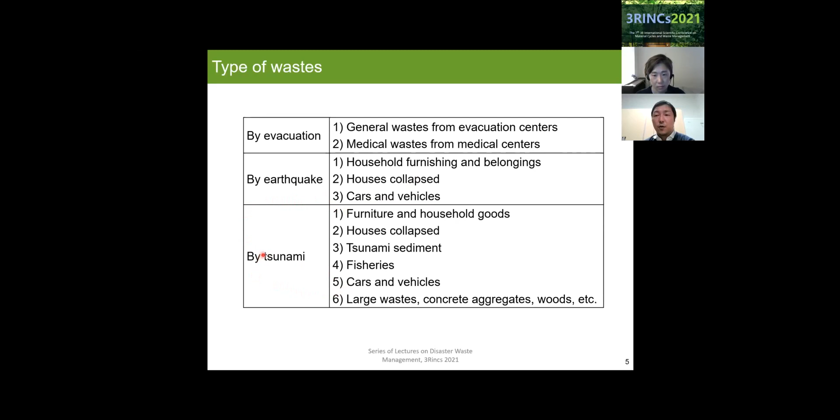But when tsunami also occurs, there are many more wastes generated, including the same categories - furniture, household goods, and collapsed houses. But in addition to these items, tsunami sediment, fisheries or aquaculture waste, concrete aggregates, wood, etc. are also generated. So a lot of various waste is generated when tsunami occurs.

So these are kind of categories - you can see they are really clearly defined, and it looks like these wastes can be generated separately. But the actual state is totally different. For example, this is a state of disaster waste - various wastes are mixed and need to be separated for appropriate disposal.

So you can see from this photo that e-waste and tires, or stoves or furniture, are mixed together. But we need to consider recycling disaster waste as much as possible. I will explain later why this separation is necessary.

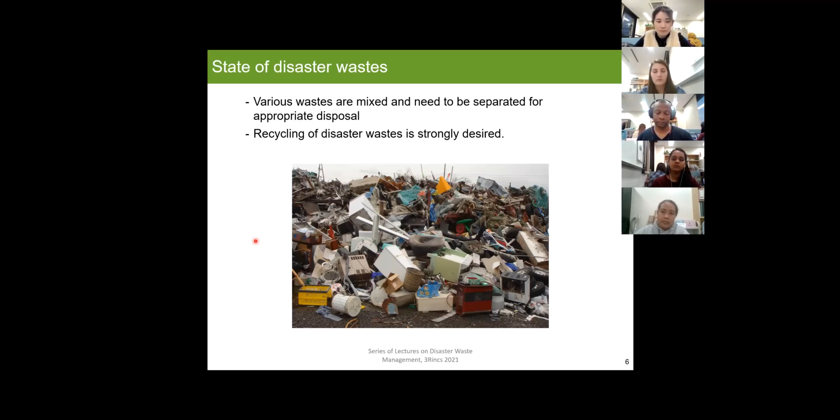This is some examples of mixed disaster waste. Of course, it's really important to remove waste from affected, damaged areas as soon as possible, because we need to reconstruct such affected areas. So the removal of waste is really important, and it has to be done quickly. To do so, of course, it's really difficult to collect, for example, only wood, only metals, only plastics, etc.

So it's very easy and fast to collect everything and deliver it to a storage site - of course it's much faster. But when those mixtures are accumulated and piled in one place, as you can see here, fires occur.

Fires occur because organic matter is included in this mixed waste. So it's really dangerous and should be avoided. So separation is really important.

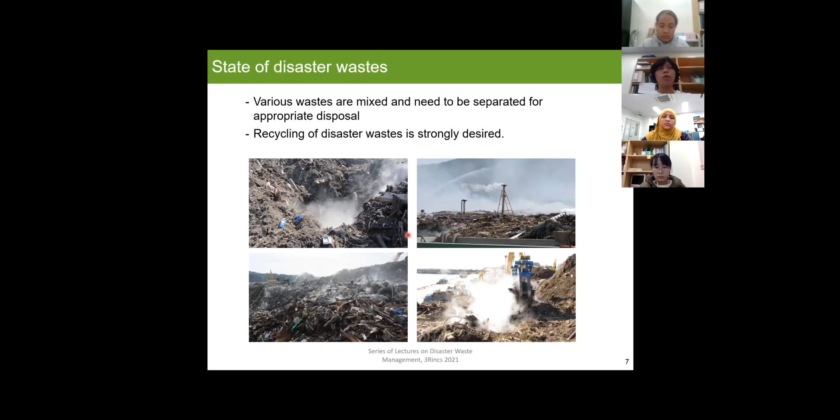Until yesterday, I went to Kumamoto. Kumamoto was affected by heavy rain last July, and flooding occurred. River flooding excavated the riverbed and delivered a lot of soil, and such sediments deposited on land.

If we use this kind of soil containing woods or other waste, such structures, for example embankments or other structures, are not strong enough. It can become very weak if the organic matters disappear over the long term. So separation is really important.

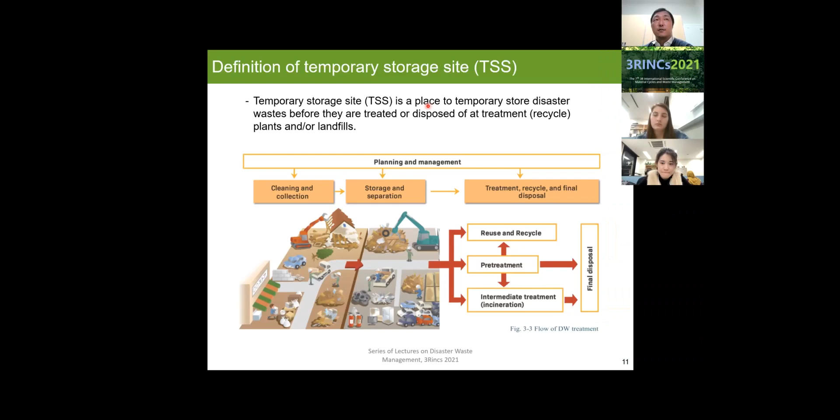About the definition of temporary storage site: TSS is a place to temporarily store disaster wastes before they are treated or disposed of at treatment plants and/or landfills. You can see this figure.

After removal from affected sites, those wastes are collected and delivered into this temporary storage site. There, the disaster waste of mixed condition is stored and separated. After treatment and separation, each material, each waste, is disposed of, reused, or recycled. This kind of place is really important to handle such disaster waste of such a large amount.

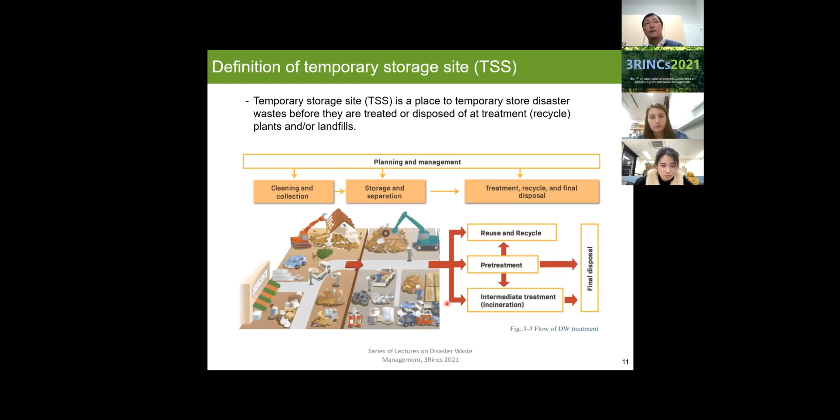Why do we need temporary storage sites? To enhance the efficiency of disaster waste transportation, for better reconstruction works of affected areas, we need to gather disaster waste in a certain place, and remove it from affected sites as much as possible. So this kind of temporary storage site is really necessary.

Also, to allow separation and enhance reuse and recycling - this is also a really important issue. To reuse and recycle, to utilize disaster waste, separation is really important. So to do such separation work, temporary storage sites are really necessary.

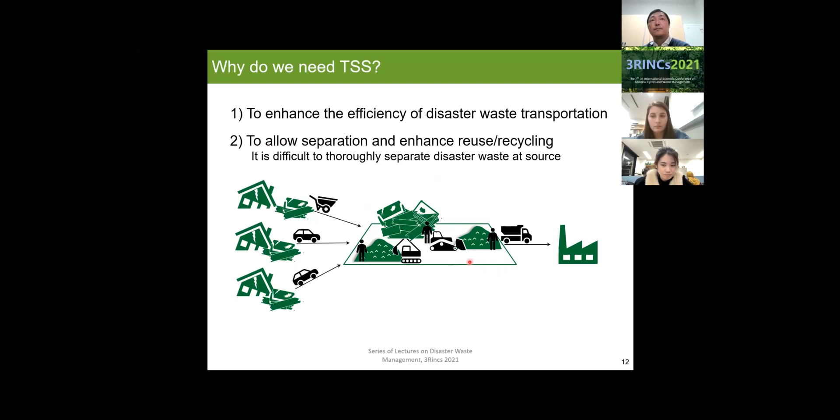So I explained the necessity of temporary storage sites. What would be the requirements for such sites? There are many requirements, but I think there are two main ones. First is easy access from affected sites, but not too close to residential areas.

A lot of disaster waste has to be delivered into temporary storage sites. If the site is too far from the affected sites, it takes time and costs a lot, so it's not effective. It should be close to affected areas.

Especially when disaster waste becomes a problem, it's generated basically in downtown areas. If disaster waste is generated in, for example, a forest or very countryside area where nobody lives, some guys may leave that waste for a while. But when we have to hurry up disaster waste treatment because it occurs in a downtown area, we have to remove that waste as soon as possible.

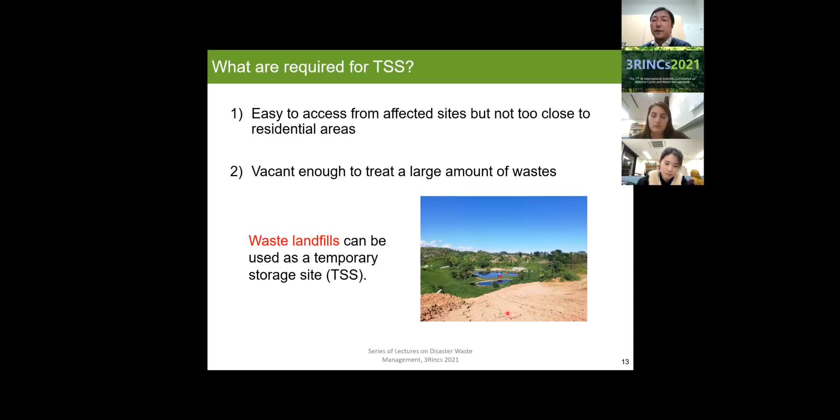So this is a quick review of the knowledge about the temporary storage site and waste landfills. The space for separation, which can accelerate recycling, is really a good aspect of waste landfills. So again, waste without separation, but resource after separation. So waste landfills can ensure enough space for separation works.

I explained that separation is really important, but of course we cannot achieve 100% recycling, and some waste should remain as waste, and we have to dispose of it into waste landfills. So if we conduct such separation works in waste landfills, it's very easy to dispose into landfills, and it can accelerate disaster waste management.

The amount of waste disposed into landfills may vary according to the type of disasters or the magnitude of the disasters, but we always need to ensure enough remaining landfill capacity, always.

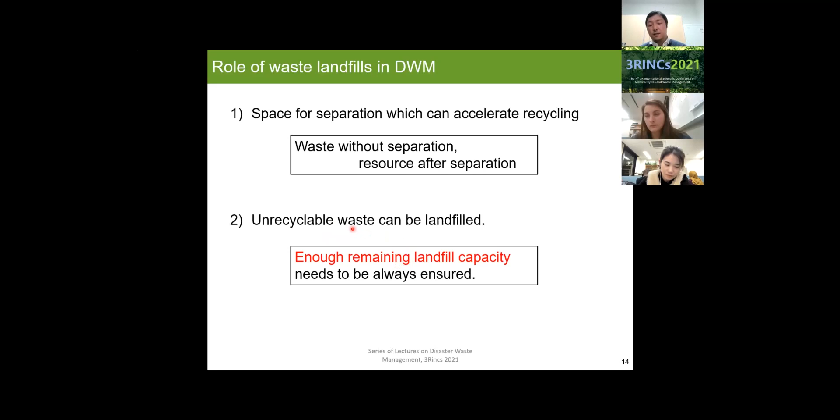Okay, today I'd like to give you two quizzes. The first one is this: I'd like to think about necessary tools, equipment, and machines for disaster waste treatment together with you.

As a first one, for cleaning and collection at affected areas, not the temporary storage site, what will be necessary to clean and collect that disaster waste? And the second one is storage and separation, which should be done in temporary storage sites. So what will be necessary to conduct temporary storage and separation works there?

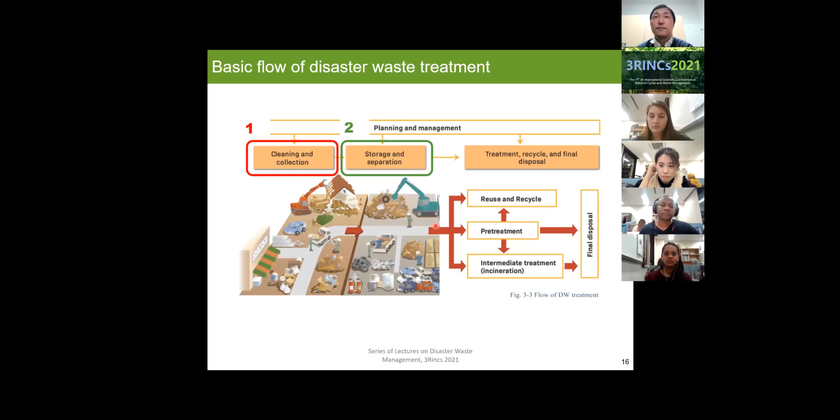I'd like to give you one minute to think about the necessary tools, items, or equipment. First, about cleaning and collection. Please think for one minute. There should be various tools and equipment. But if it's really difficult for you to think, I'll give you one hint.

These are just examples of my idea, but I could categorize them into two. The first one is personal equipment, tools, and machines. What would be possible necessary items for cleaning and collection?

Yes, can we start answering? Yes, for personal equipment, I would select helmet, gloves. Generally, all the PPEs are necessary, and also masks sometimes. Yes, you're right. Anybody else? Do you have any?

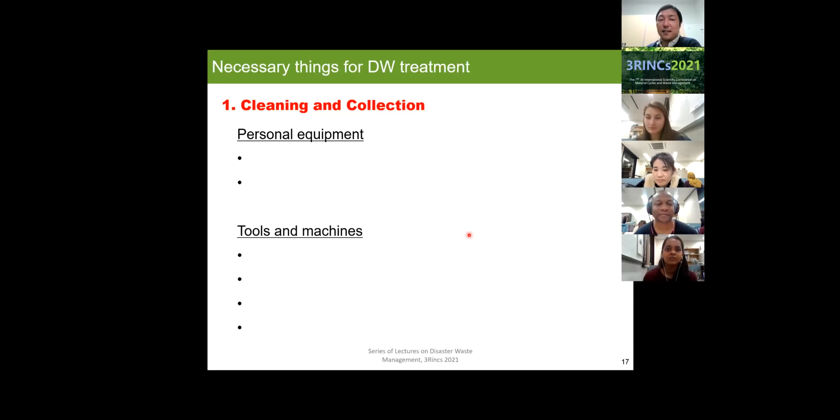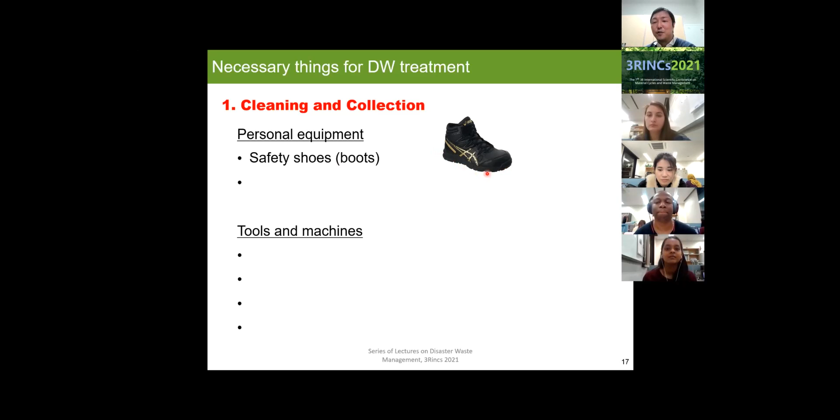Those personal equipments, general personal equipments, are of course necessary. But in addition to those ordinary items, I think this is also kind of an ordinary item: because a lot of waste is collapsed and there are a lot of sharp items, sharp waste, safety shoes should be equipped to do the removal works in affected areas. Do you know these safety shoes? An iron plate is installed in the shoes, so it can avoid puncturing your foot.

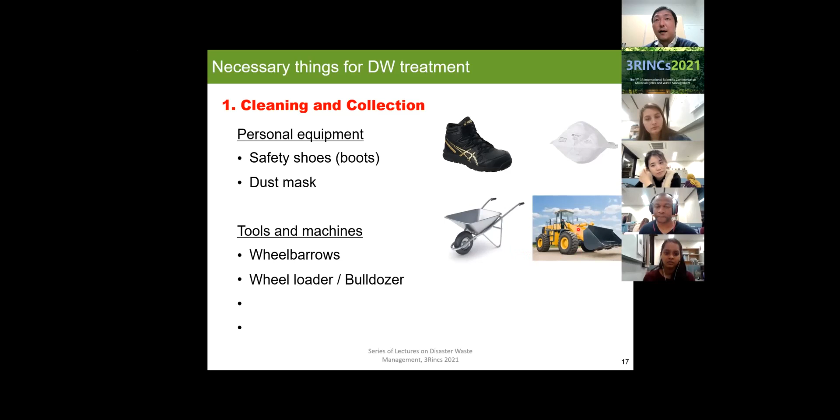And as tools and machines, I think this is really typical and a conventional item, so any country should have this equipment. So this kind of very simple equipment can also help the removal of disaster waste. Wheelbarrows, and this kind of bulldozer or wheel loader, this kind of heavy machine is also important.

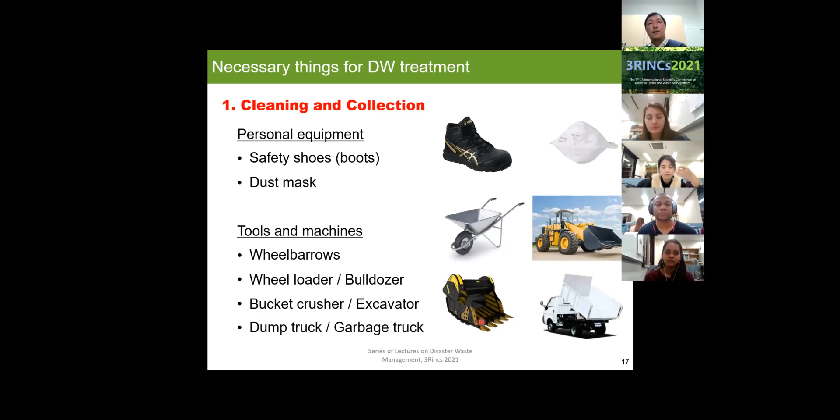An excavator is just a shovel, power shovel, but this is a kind of special bucket, and it can be used as a sieve, so it can collect only large items. If necessary, this kind of bucket is also important. And of course, dump truck is necessary to deliver from affected sites to temporary storage sites.

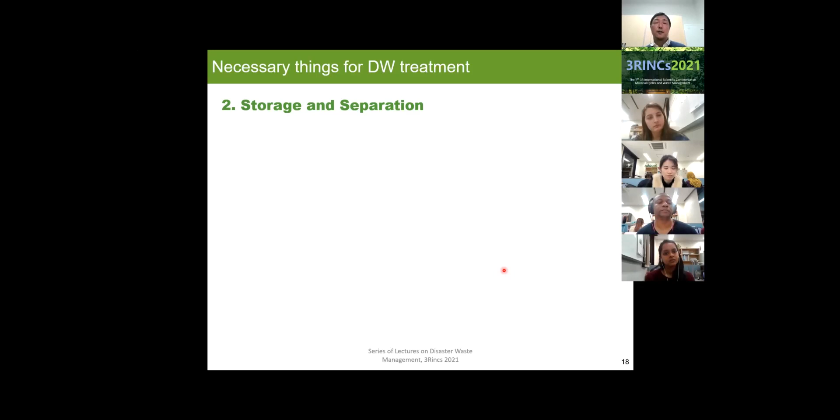Okay, so how about the necessary items for storage and separation? So I give you one minute again to think about this phase.

Professor, I have one question about that. Could you give us some hint about what is separation in here? Okay, so separation means separating mixed waste into each fraction, for example metal, wood, soil, plastic, etc. But this separation works consists of very basic processes, mainly crushing and sieving. Do you know sieving? Sieving is to remove small fractions, tiny fractions. It's using mesh. Okay, so separation works are crushing and sieving. Thank you so much, understand now.

Do you have any opinions or answers for this? Yes, can I answer? Yes, please. I think it needs to move screen or dump car or something to separate and storage, I think. Yes, exactly. What else?

I can give an answer. Yes. Some machine that we can use in storage and separation, I think, is a crusher, steel plate, we can use in this item. Yes, thank you for your answering.

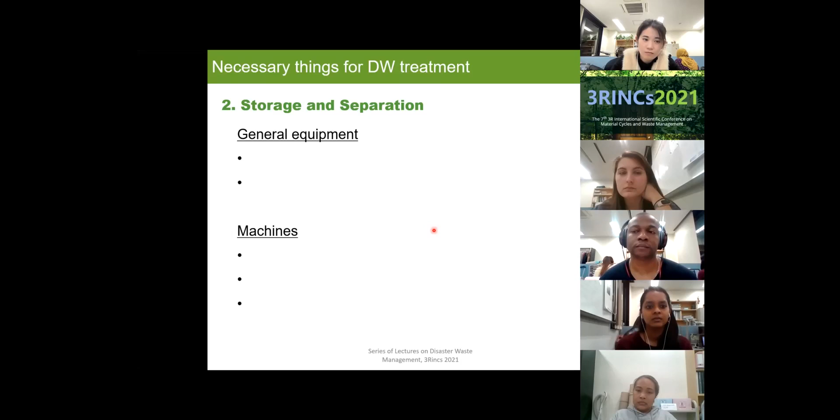Yes, as general equipment, as you said, steel plate is really necessary because some grounds are really muddy and cannot support the heavy machines for separation works. So to realize effective separation works, this kind of steel plate is necessary.

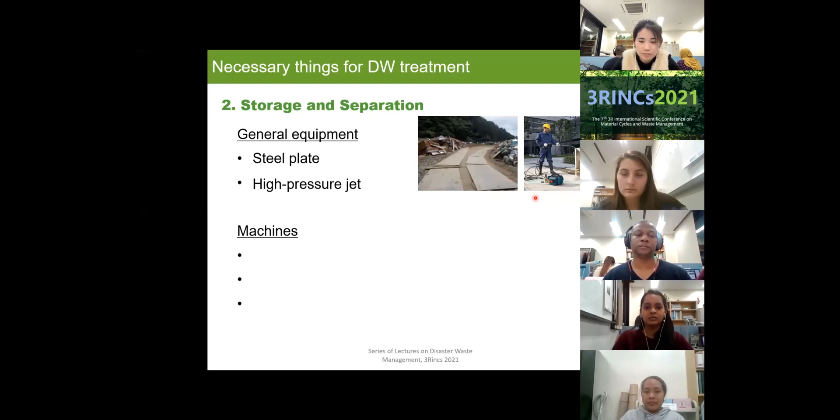And high pressure jet is also necessary. I don't know if all the countries have this kind of jet, but this is really simple - it's just a jet to remove soils from tires. Because if we don't use this high pressure jet, the trucks and dump trucks will deliver soils with those tires, and it will distribute a lot of soils around the temporary storage sites. So in Japan, not only for disaster waste management but also in ordinary waste management, we always use this kind of high pressure jet to remove the soils on tires before they go out from the site. So this kind of high pressure jet is also necessary.

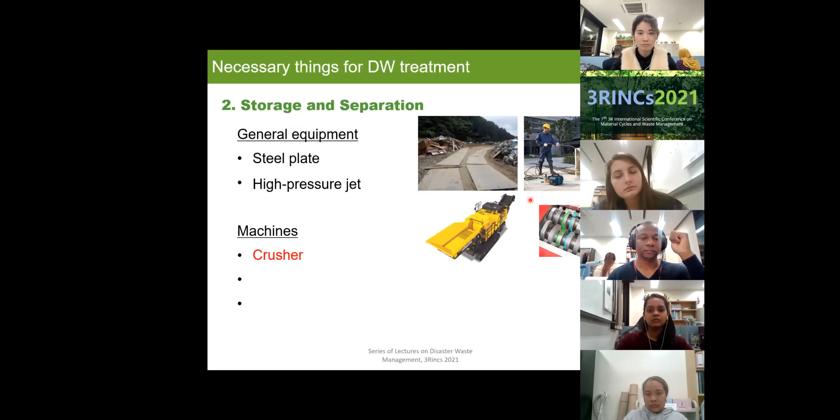Yes, and I explained that separation works consist of crushing process and sieving process. So this kind of crusher is also necessary. But I think any countries should have this kind of similar equipment for crushing some materials, also for rocks or mining or such activities. It's very simple - it just crushes large fractions into small pieces.

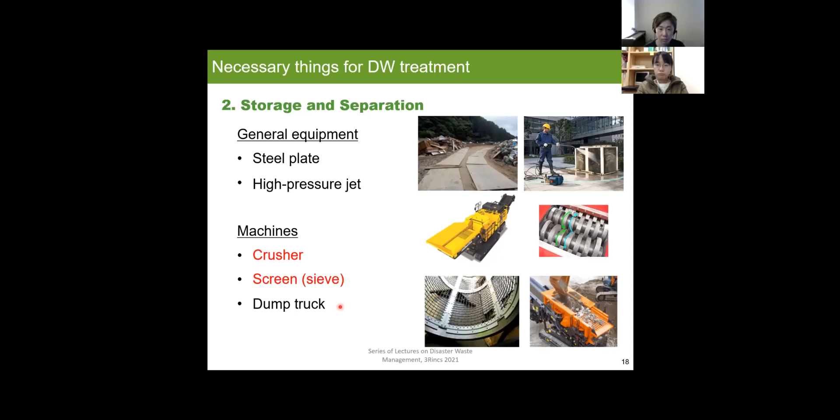And of course, dump trucks are necessary to deliver. So these are really fundamental and basic items, but I think you could recognize that separation works can be done with very, very basic and simple equipment. So I think that's a really important knowledge. Separation works sounds a little bit difficult or advanced, but they are not too advanced, and it's really a simple method. So I think in any countries, separation works can be done using conventional and typical equipment.

So I'd like to introduce only one case study in Japan: separation of disaster waste in 2011, the Great East Japan earthquake.

So in 2011, as you know, the Great East Japan earthquake occurred, and a lot of disaster waste was generated. The basic concept of disaster waste management in this disaster was to preserve the living environment of residents and achieve fast and proper recovery from disaster, but we also needed to achieve reduction in waste disposal.

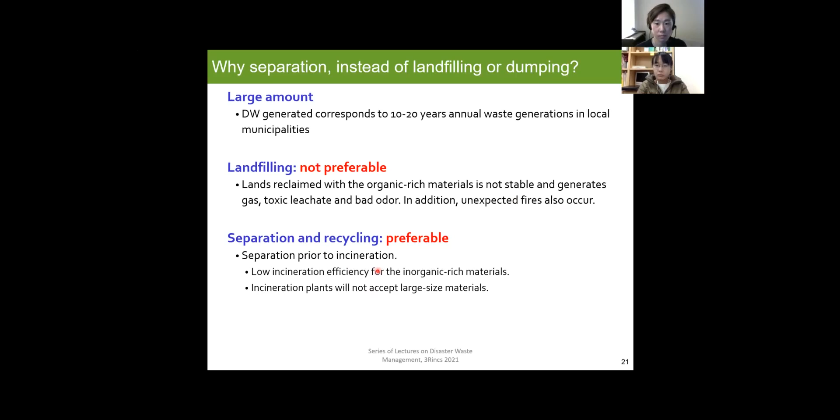In addition, as I explained at the beginning, unexpected fires also occur due to such organic matters. So we had to avoid landfilling all the waste, and we had to utilize disaster waste as much as possible. So separation and recycling was preferable. There are some reasons for the necessity of separation, but I think you can easily imagine why separation is important.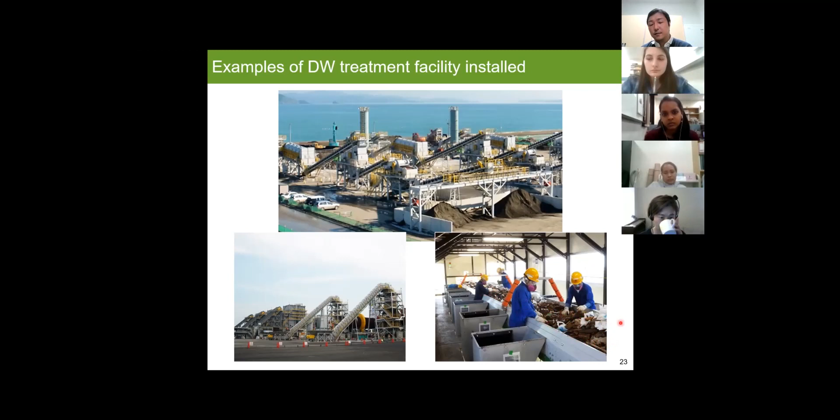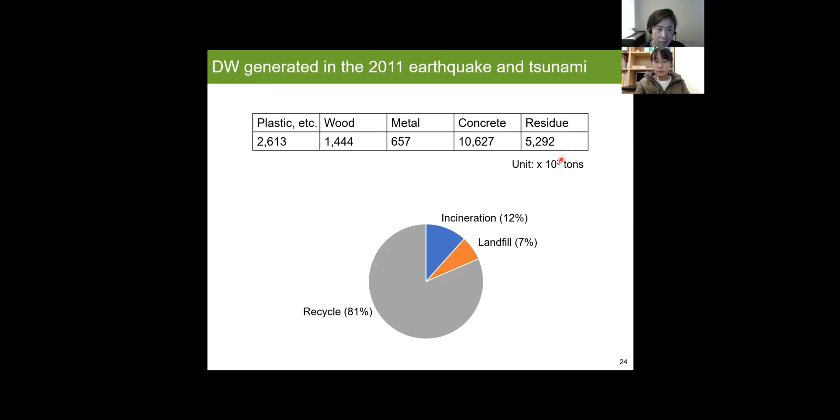Sometimes this kind of manual separation by hand was also conducted. By using these various techniques, we could obtain plastics, wood, metal, concrete, and residues. Residues means soil with some waste, because it's really difficult to extract only soils - very tiny pieces of waste can also pass through the sieving. So it's very difficult to collect only soils; small wastes are also contained, so we call it residue.

But anyway, by separating the disaster waste into these categories and materials, we could achieve recycling of more than 80%. But if we didn't conduct separation works, we had to dispose of everything - this orange part should be 100.

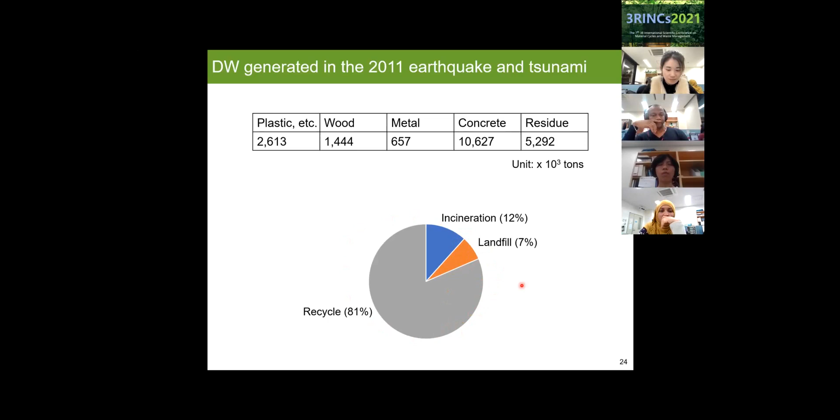So the separation works are really important. Okay, so I'd like to change the topic.

So this is a second quiz about the transport scheme for disaster waste. I explained that disaster waste has to be removed from affected sites, and it has to be delivered into temporary storage sites for further separation works.

So this kind of transport scheme is necessary from damaged areas, affected sites, to temporary storage sites (TSS). In the case of the 2011 Great East Japan earthquake, we prepared two different types of temporary storage sites: first temporary storage site and second storage site. Also between these temporary storage sites, we had to deliver that waste, and also after treatment, from TSS to treatment, utilization, or landfill. So these are our final destination of disaster waste.

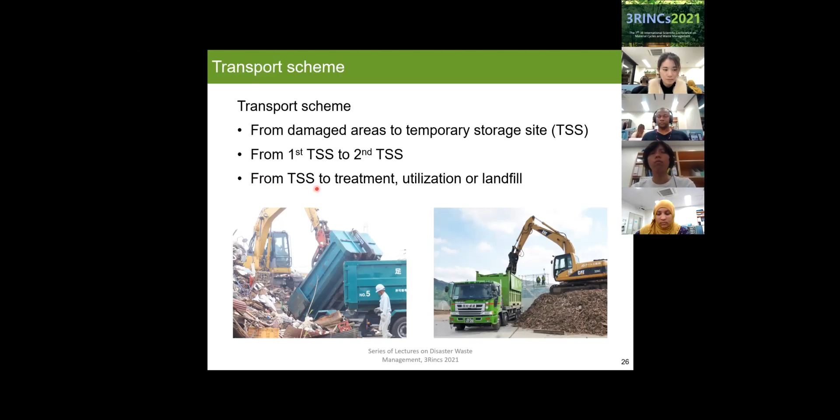But when we consider this kind of transport, of course we have to think how to deliver, how to transport this disaster waste. So I'd like to give you one very simple question.

Okay, so let's assume this kind of waste. First one is wood pile. Pile means small mountain accumulated. So wood pile, concrete pile, metal pile, and soil pile. Let's assume that the mass of wood was 200,000 tons, concrete has 280,000 tons, metal 110,000 tons, and soil 300,000 tons.

And then let's calculate the necessary number of dump trucks to deliver this waste. So how many 10-ton dump trucks do we need to deliver this waste? A 10-ton dump truck means a dump truck which can carry 10 tons at one time.

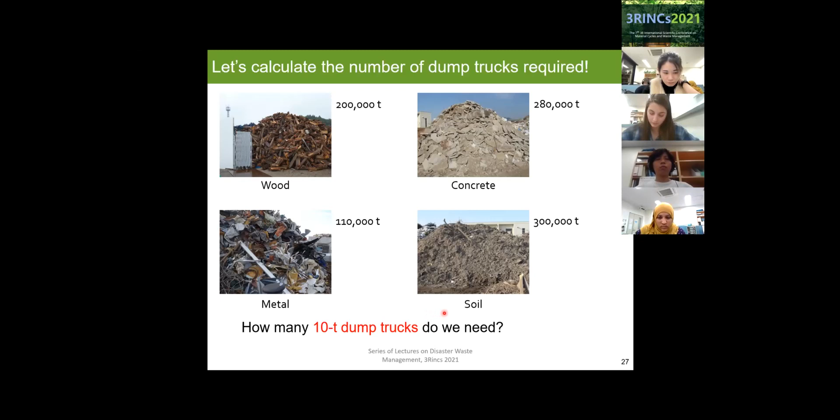Can I try? Yes, please. So if one dump truck can carry 10 tons, then we would have 20 plus 28 plus 11 plus 30. That would be 89,000 dump trucks, right? Okay, yeah, so...

Yeah, you mean this kind of calculation, right? Right, yes. So for 200,000 tons, it should be 20,000 cars, and 28,000 cars, 11,000 cars, and 30,000 cars. And then we sum it up. Total, yeah, the sum is 89,000 cars, right?

Yes, but not correct. Not correct. Why? Why is this calculation not correct? Okay, yeah, it's really bad question, and really tricky.

And of course, we have to consider the loadable capacity, the capacity of a dump truck. And I explained that let's use a 10-ton dump truck. So of course it can carry 10 tons, but it also has a maximum volume. It can carry only 7 cubic meters.

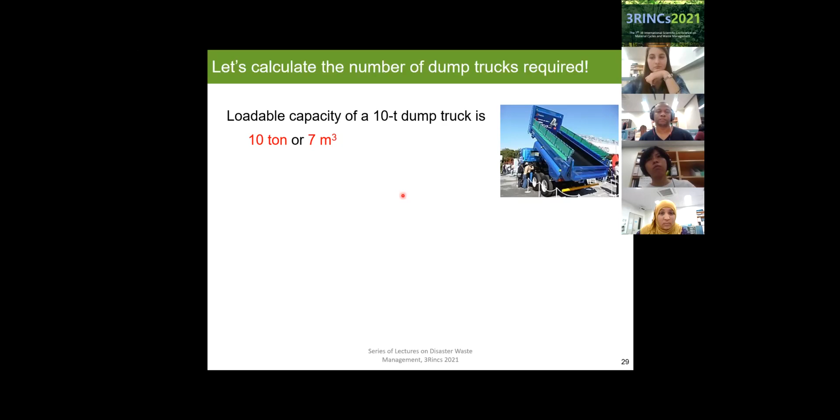So when we calculate the necessary dump trucks, we also need to consider the specific gravity. Specific gravity is a little bit difficult, but specific gravity is the mass of unit volume. Unit volume means 1 cubic meter. So when we cut 1 meter by 1 meter by 1 meter, it should be 1 cubic meter.

And the mass of that 1 cubic meter is the specific gravity, the apparent specific gravity. So if we cut water with 1 cubic meter, it should be, of course, 1 ton. But when we deal with other waste, it should be different. So I'll give you some answers for these materials.

Okay, so for example, when we cut this wood pile with 1 cubic meter, it should be just 0.4. So it's very light. And concrete, I think you can imagine that concrete is very heavy, so it's larger, larger than wood, and larger than water. Water should have 1.0 ton per cubic meter.

Okay, and metal. Metal itself is very heavy, but you could see that this kind of metal has various shapes, and it's not solid metal. So it's very sharp, and there are a lot of voids, a lot of space between those metal wastes. So when we cut this metal pile with 1 cubic meter, it should not be very heavy.

It's just 1.1. And soil, because small particles can become very dense, so it's heavy, heavier than concrete. So by using these values, we can calculate the mass of 7 cubic meters. This 7 cubic meters is the acceptable volume of this dump truck.

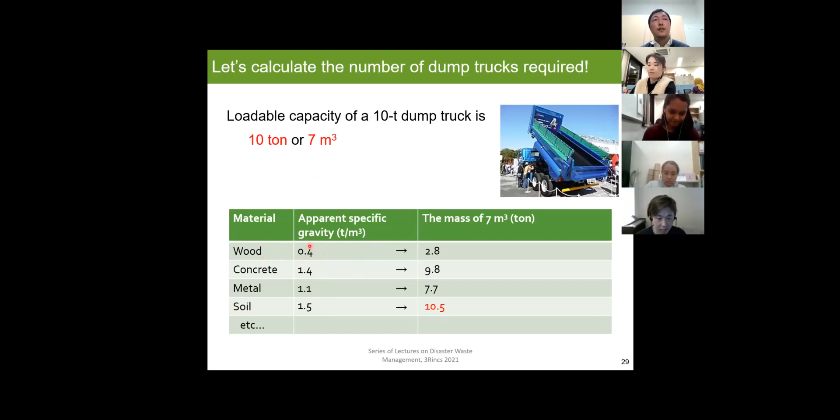I showed you these values, apparent specific gravity. So for wood, it has only 0.4. By using this value, the volume of this 200,000 ton can be calculated as shown here. So by weight this is 200,000 ton, but when we calculate it into volume, it has a different value, of course, and it has 500,000 cubic meter. So to carry this 500,000 cubic meter, by dividing 500,000 by 7, this value can be obtained.

Let's do the same calculation for each material. For concrete, this concrete of 280,000 ton should be 200,000 cubic meter. So to carry this 200,000 cubic meters, we need this number of dump trucks. And also for metal, we need these cars. But soil, as I explained in a previous slide, cannot carry 7 cubic meter, it can accept only 10 ton. So that's why we need 30,000 cars.

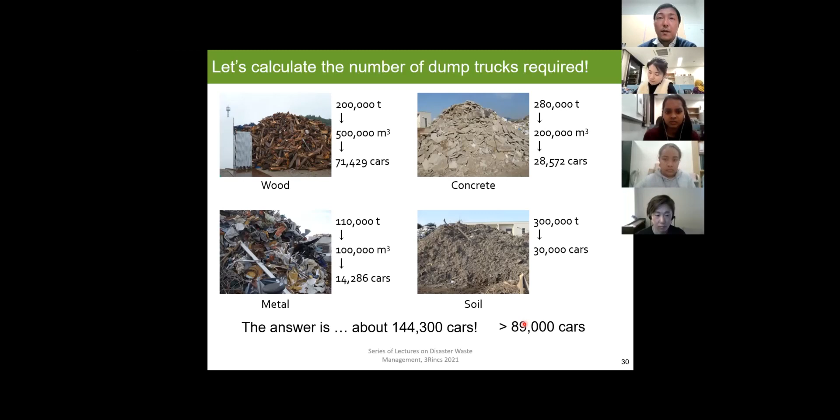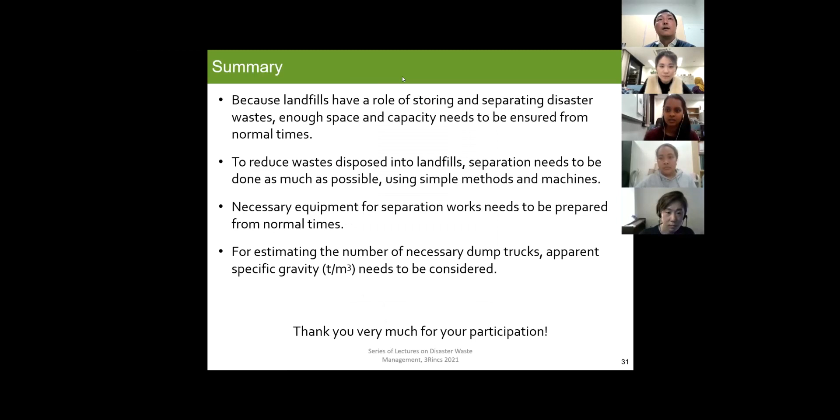He asks, thank you, what is the best technique for wet organic waste during the disaster? Wet organic waste during disaster. So wet organic, yeah, I think maybe like wet wood or wet trees, something that is easy to rot, maybe.

That's really difficult to answer. But basically, we try to leave the disaster waste in open air. I didn't show you today, but when the disaster waste is wet, it's really difficult to separate, because soils in wet condition can act like a bonding agent in various ways. So the best way may be adding some chemical agent to dry it, but for a simpler and cheaper method, we just recommend you to dry it in open air.

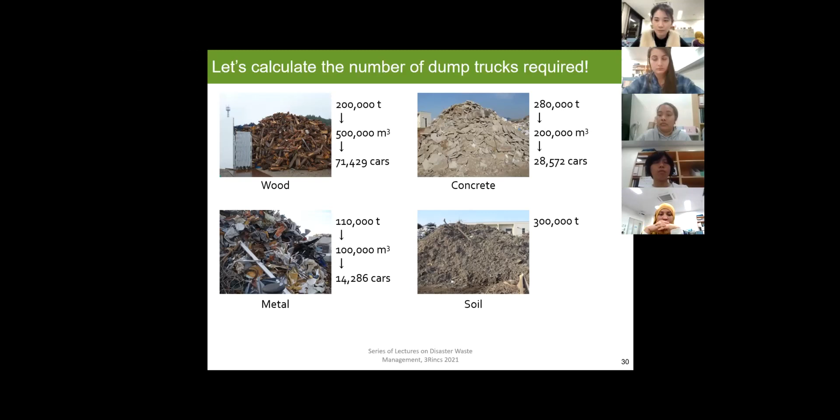And indirect measurement was conducted in 2011, because it's really difficult to measure the weight of trucks immediately after disasters. Sorry, can you hear me? Sorry, okay, yeah.

So yeah, after the disasters it was difficult to manage the weight using the truck scale. So, without any... sorry, my earphone is not good. Can you hear me? Okay, good.

Thank you. So yeah, in 2011, in a temporary storage site, some guys took a photo, and after taking photos they extracted fractions: this is wood, this is metal, this is soil, etc. And after calculating, the total mass was also a really brief calculation, just visual measurement. It looks 5 meters or something, 5 meters, 10 meters or something.

So by roughly calculating the volume of the pile, they extracted each fraction by hand. This is wood, this is soil, this is plastic. So the ratio of the entire pile should be like this. But of course there are very large errors because it's not very accurate. So they recalculated many times.

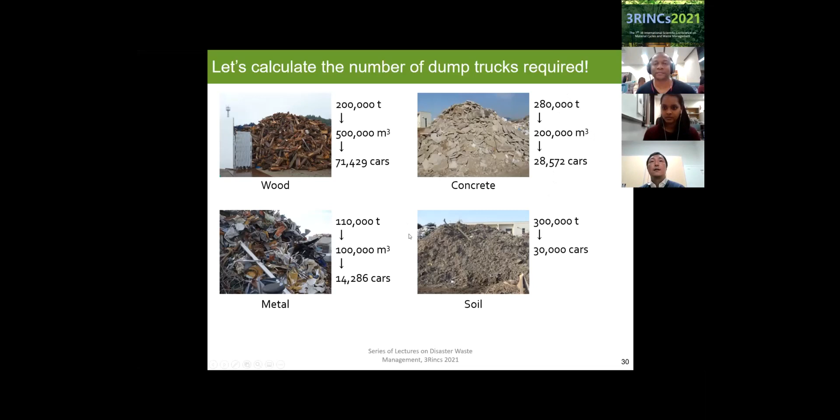Thank you for your question. This is just a typical value, and it's still very, very difficult to determine this apparent specific gravity as just one value. Some reports say that the apparent specific gravity of wood would be 0.2, while other guys may say 0.6. So there is really large variety in these values, so it's really difficult. But I showed you one typical value, one kind of average value of the values introduced in some papers.

And about the second question, actually it's difficult, it's not impossible to utilize contaminated soil. Because of course there are many methods to purify contaminated soil, but if it's available near the temporary storage sites, it may be possible. But basically, also in the 2011 Great East Japan earthquake, contaminated soil was disposed into landfills, but the amount was not too much.